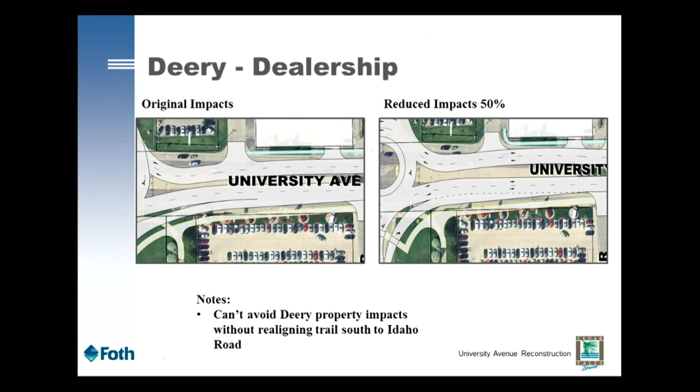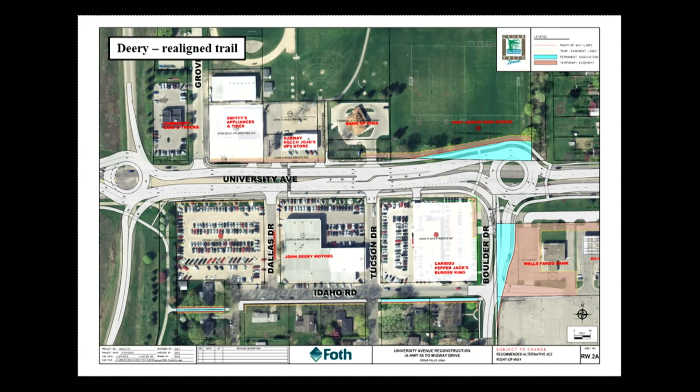So what we've done here is a bigger scale drawing. One of the options we looked at is actually routing the trail, connecting it into the existing trail on Idaho Road back there, and routing that along through Boulder, while still connecting a 5-foot sidewalk in front of his dealership, connecting back into the trail system.

We actually met with Mr. Deery today—some members of our team met with him here at City Hall and then out on his site looking at some of these improvements. I think what he agreed to is that we have some options out there, and he'd like to continue exploring some of those options.

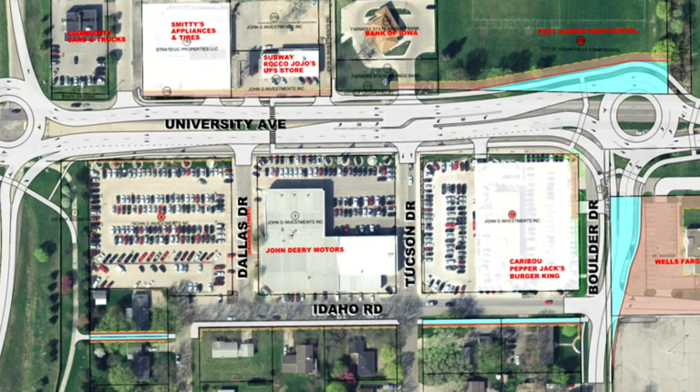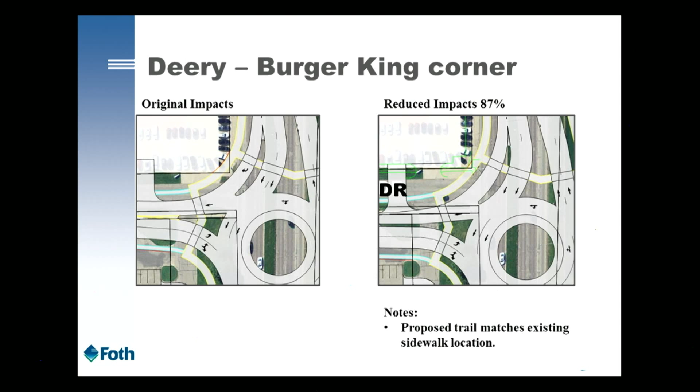If you look at the corner of University Avenue and Boulder Drive, we're actually trying to stay away from that corner. Let me zero in on that a little bit. Our original impacts showed we were getting into that right-of-way quite a bit, but now we're only looking at obtaining about 38 square feet from Mr. Deery at this time. Right now that's actually existing sidewalk, and this would formalize that, making sure it's on city property.

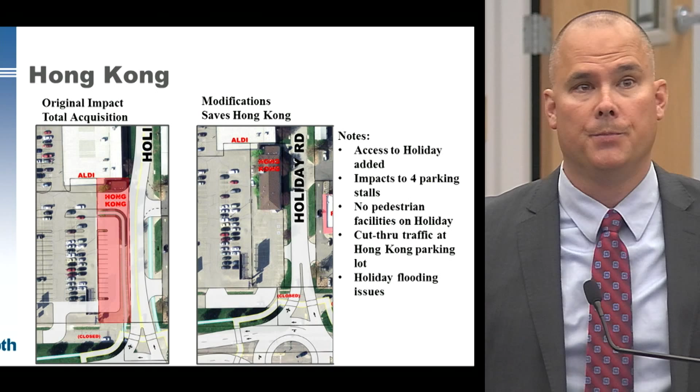When you saw the original concept back in February, one of the problems was figuring out the geometry, and with 3 concepts in front of the City Council, we didn't want to go too far into any one of those designs. So what you saw was basically a worst-case scenario. In that worst-case scenario, Hong Kong was actually going to be required to have a full take, and we would look at creating an ingress-egress along Holiday Road.

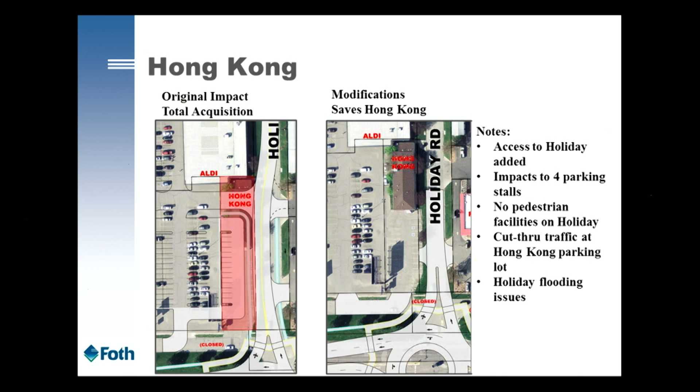One of the things we've been able to work on is actually saving the building and looking at the geometry along there, then providing an ingress-egress across from Famous Dave's. We met with the owner, and he really likes this particular plan, but one thing we're a little concerned with is cut-through traffic, so we'll continue to work on some of those details as we go through.

As late as January, this was one of the original concepts that we had coming in off Waterloo Road. As we further designed that particular concept, we ended up with modifications 1 and 2. The first modification coming in from Waterloo Road on this particular leg of the roundabout took up about 20 parking stalls, and they really had no access to the frontage road for the business of Amigos.

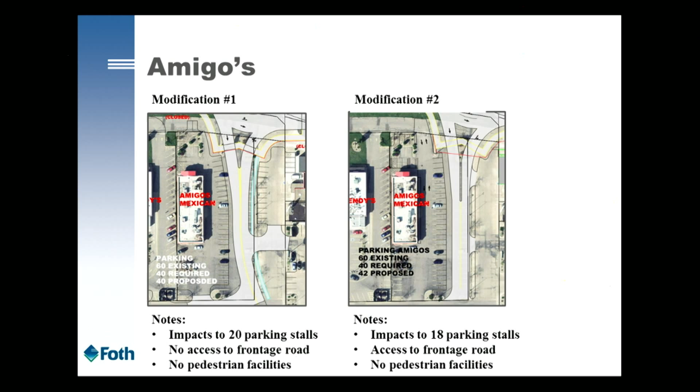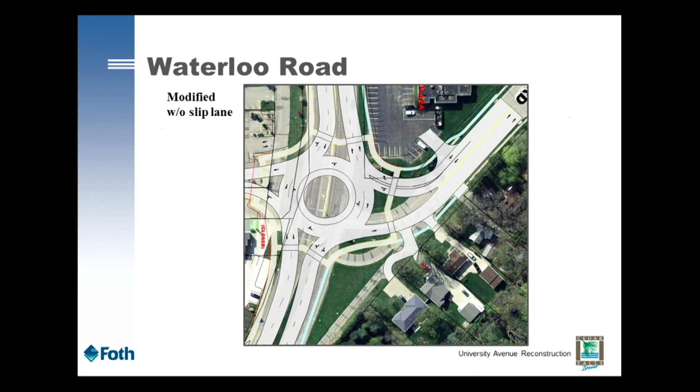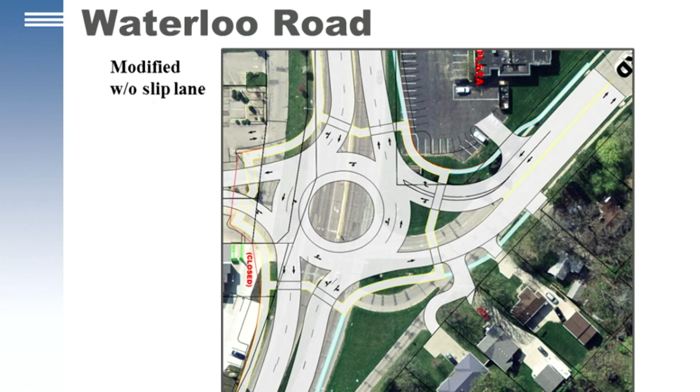This is one of the original concepts that came through there. One of the things we saw from a traffic perspective on Waterloo Road is the original had the slip lane, very similar to what it is today. We were pulling that a little bit away from the homes there. But we also noticed that if we totally eliminate the slip lane, we still maintain the same level of service out there, and the function of the roadway stays the same. So we have looked at that.

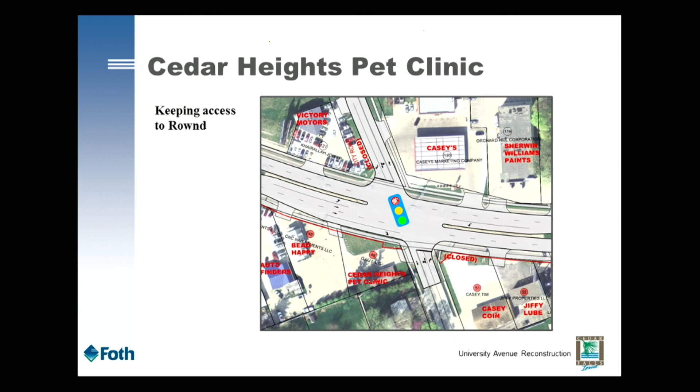This is a little bit past the limits right now, but we're working with the Cedar Heights Pet Clinic, establishing one of the concerns that Mr. Jorgensen had in that area, which was access to his business off Rownd Street and University. Those two particular access points will stay.

Moving forward, here's a couple other modifications and things that we've heard, whether we're talking to property owners, council members, the school district, or just general citizens in the area, is the added crosswalk. What we're looking at doing right in front of Subway there is a trail extension that would be a mid-block crossing for pedestrians. We haven't got all the design details worked out, but we've identified that as one of the solutions that would be very good along that particular corridor.

Some of the other design things we've added at Valley Park Drive: making the south leg a 3/4 access, so if you were westbound on University Avenue, you'd be able to make a left into the Hy-Vee parking lot. You'd also be able to take a right. If you're headed eastbound, the movement you wouldn't be able to take in this particular location would be a left turn going northbound onto Valley Park, or a straight through movement.

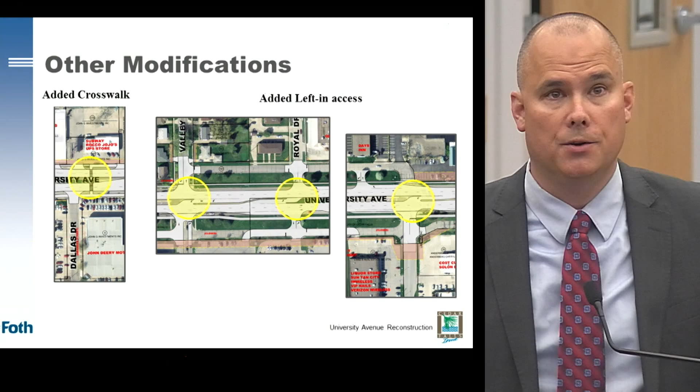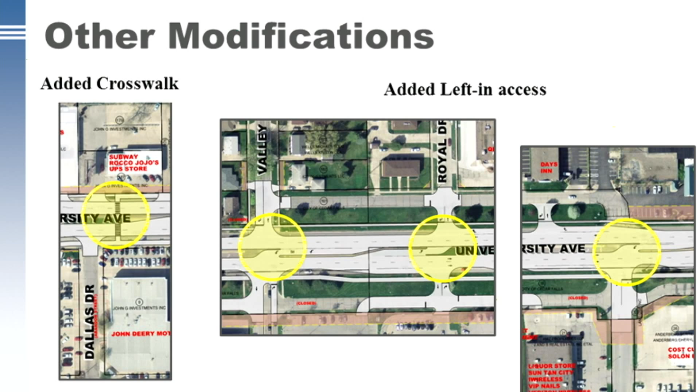We also have put that same type of intersection control at Royal Drive. Really what we're trying to do at Royal Drive is maximize the amount of traffic that can actually get to the businesses in that mall area with Buffalo Wild Wings and the music store and those particular businesses in there. We also have that 3/4 access going into the Blackhawk Village area that would split right in between, I believe it's Happy Liquor Store and Cost Cutters, right there at that particular location.

Again, this was meant to be a brief update, and those are some of the more major things we've done with regard to design alterations at this particular point. We're concentrating on that Grove Street to Hillcrest Drive area to try to get everything wrapped up for a bid package later this year, so we get that under construction and started next year. With that, I can address any questions or concerns.

Yeah, Mark, terrific. Thanks for working hard with businesses, and this is exactly what I think, at least I think the majority of council is hoping how this process would work. We still have quite a bit of work to do with a number of the businesses and residents out there, but...

I think it's really, again, as you start to scale that down and get more defined in what that design is, we can tell exactly what those impacts will be. Are we, as of right now, Ron, still on track for a letting late this year? Are we going to be able to really achieve what we're hoping for? So, the consultants are here this evening, and that's what they're tasked moving forward with.

One of the other things I wanted to give a brief update on is we have been seeking a Tiger grant. As I briefly updated last week, we've got some real positive feedback. One of the things you'll see coming forward, probably next council meeting, is a resolution of support. What we're looking for is about $12.5 million for this particular program, and this grant is aimed at large projects like this.